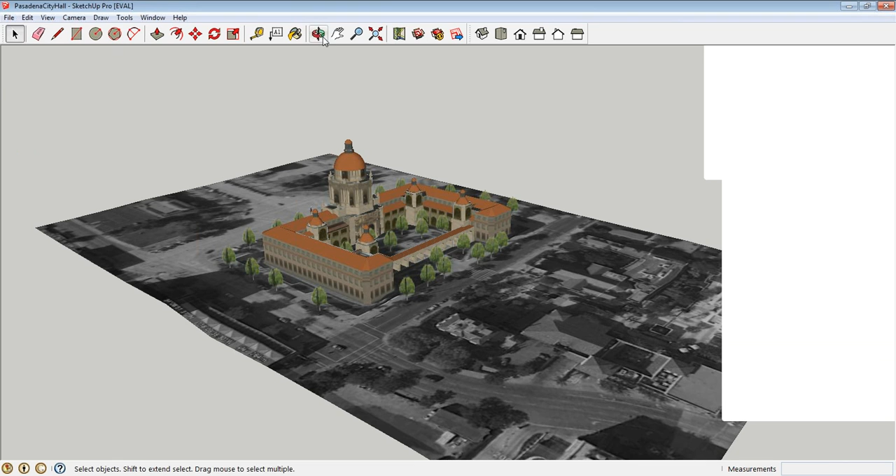Let's go ahead and take a look at Revu 12 in action. First, we'll go ahead and jump into SketchUp Pro so that we can demonstrate the new SketchUp Pro plugin.

Introduced in earlier versions of Revu CAD and eXtreme was the ability to create 3D PDFs from Revit, Navisworks, SolidWorks, or any IFC file. But now with Revu 12, you can go ahead and create 3D PDFs directly from SketchUp Pro by exporting a 3D model to Bluebeam.

We can go ahead and export this right to the desktop. And this really allows for a new means of communicating design ideas or articulating complex 3D information in the universal 3D PDF format.

So now that this 3D PDF is created, you can now easily navigate around your design model and even use section boxes to isolate portions of the model. Come on, dig right in here. Maybe chop that right in half.

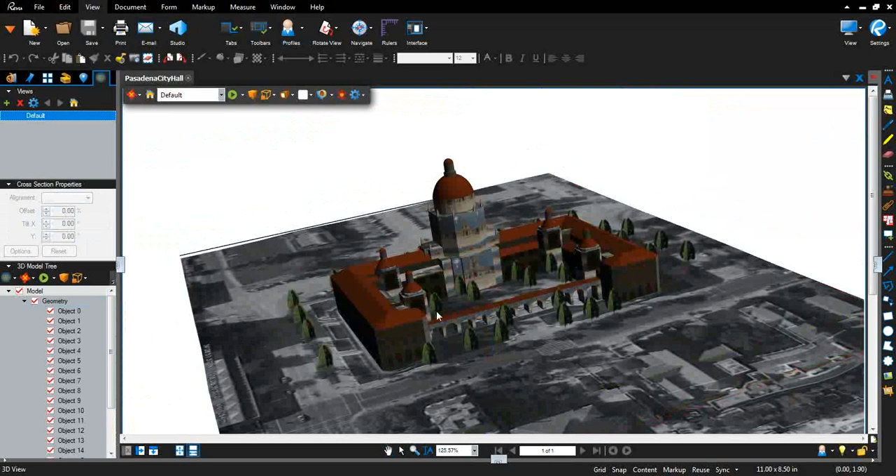Now you can also transform or move individual model components or even a full group of components over here. So we can select all these trees. And if you think about it, this would be a great way to, for example, explode your model diagrams, showing how different components assemble.

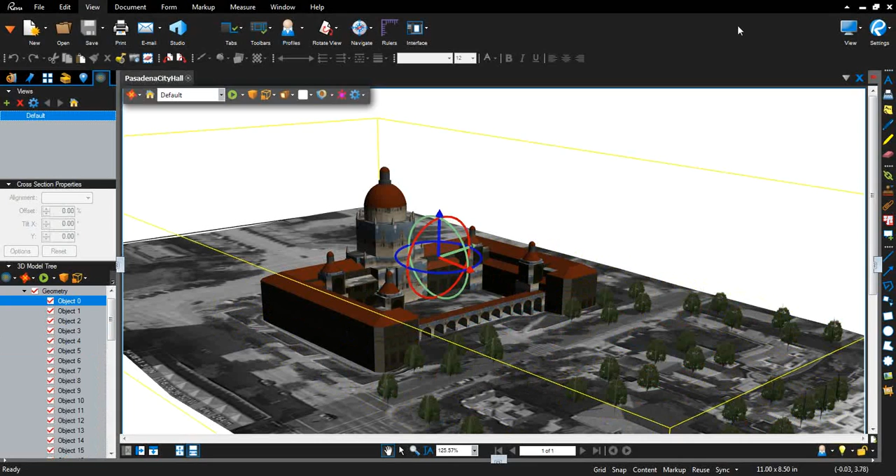And of course, using Revu, you can always add markups to your 3D PDFs, allowing you to more easily communicate project information with everybody, not just people who have expensive design programs.

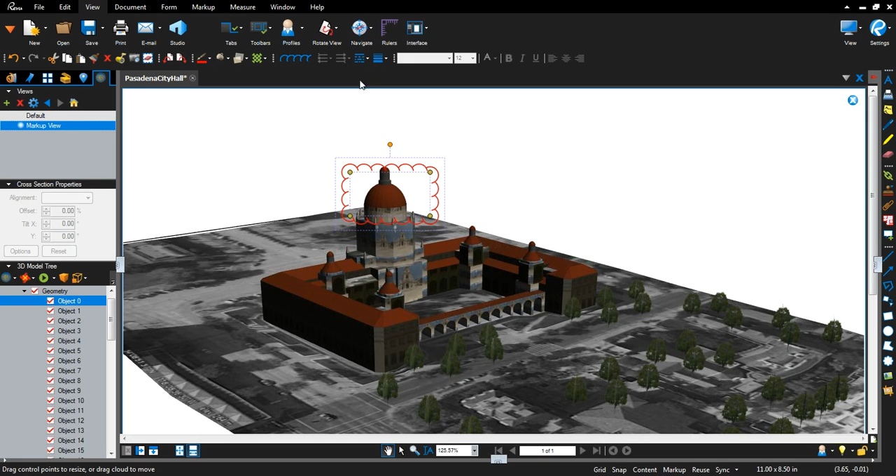So with Revu 12, our robust 3D PDF options have expanded, but we've also added plenty of enhancements in the 2D world. So let's go ahead and take a look at those now.

So to go ahead and get started here on your project, one of the first things you're typically going to want to do is to create a smart document set that's easily navigable by users in the field.

So if we open the Thumbnails tab over here, one of the things that you'll notice is that these pages are all numbered pretty generically, 1, 2, 3, 4, etc. Instead of manually typing in the appropriate drawing number for each page label, we can simply go ahead and click Create Page Labels, and actually use a page region to get that drawing number.

Now with Revu 12, AutoMark just got smarter. Now we can go ahead and select multiple regions on the page, so we can even add this drawing title perhaps, and even add prefixes and suffixes, giving us complete control over the way that our bookmarks or page labels appear.

As you can see, Revu has gone ahead and created these page labels for the entire set in just a matter of seconds, right? All labeled up.

Now, even better, your text doesn't even have to be searchable to be selectable, or selectable to be used with AutoMark 2.0. It works with files that contain non-searchable text, such as scans, to get your PDFs in order, regardless of how they were made.

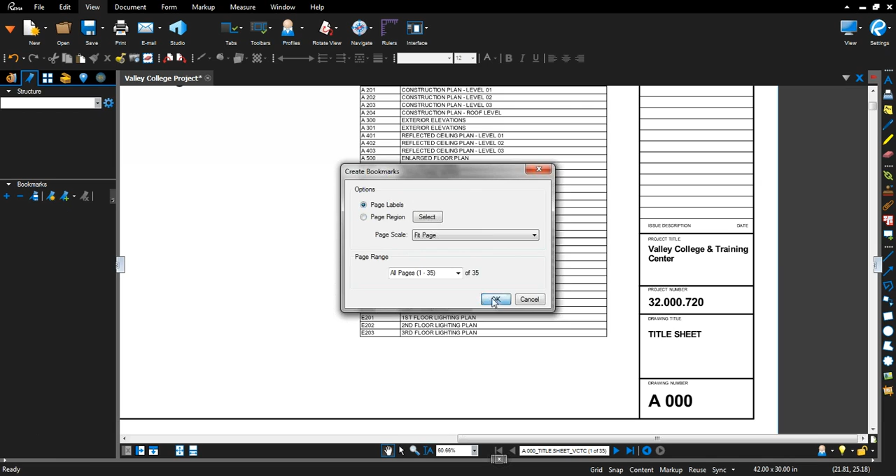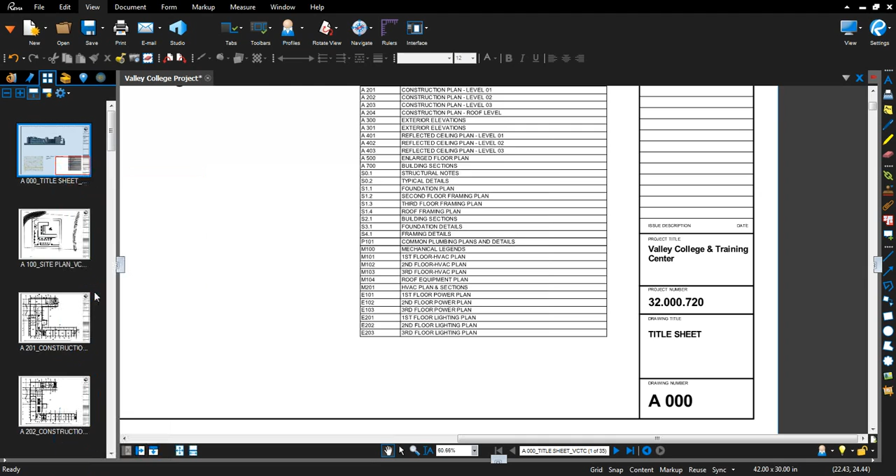Now, in the same way that we created our page labels, we can also just as easily create bookmarks for our document. And as a final step, we can easily extract each of these sheets as a separate PDF, so we can create a lean and light set of documents for quicker field access.

So we'll take all these pages and we'll extract them as separate files using those page labels to name them, and go ahead and update our hyperlinks with relative paths. There we go.

Select that folder, extract those sheets. Now what you'll see real quick right here is that we've got all of those sheets in this folder. Quick and easy.

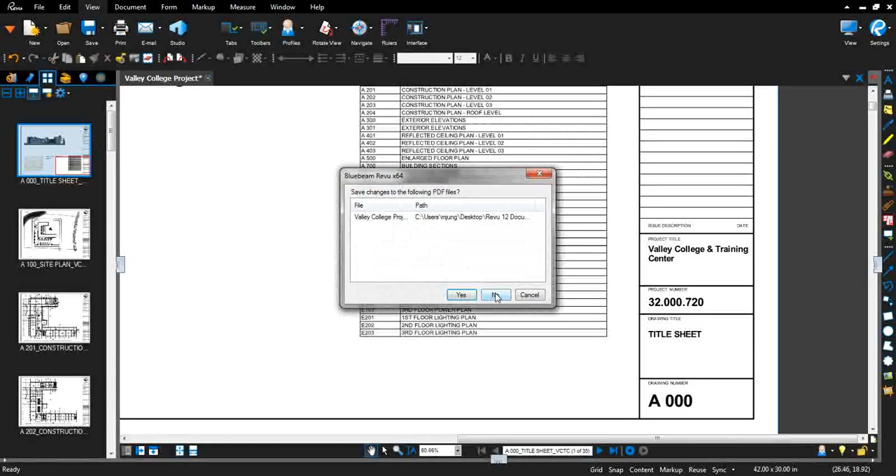Now, unfortunately, there is one drawback to working with sheets this way. That problem is that as we open each new file, they're going to open on a new tab. You lose that flexibility to work with those related files like you can in that combined set of documents.

Now in Revu 11, Sets was introduced to fix just this issue. So here within Sets, I'm going to go ahead and create a new set that will allow us to get the best of both worlds. We'll have the flexibility to keep our files light and lean and simultaneously be able to view and navigate them as if they're a single document.

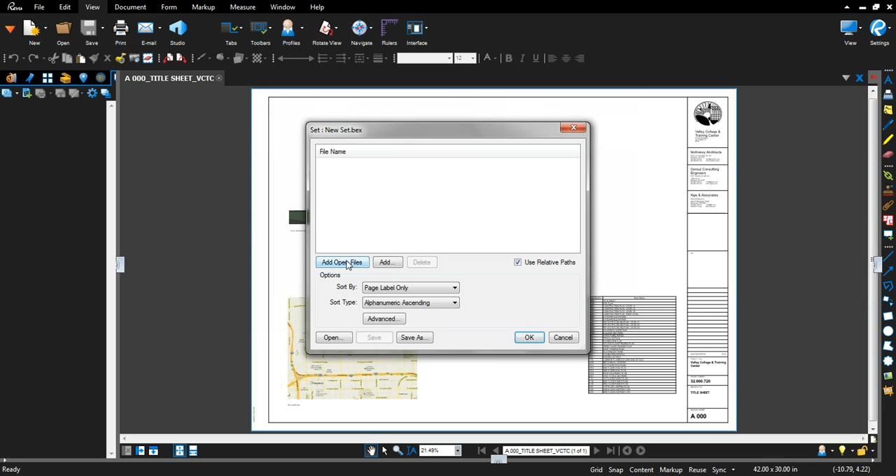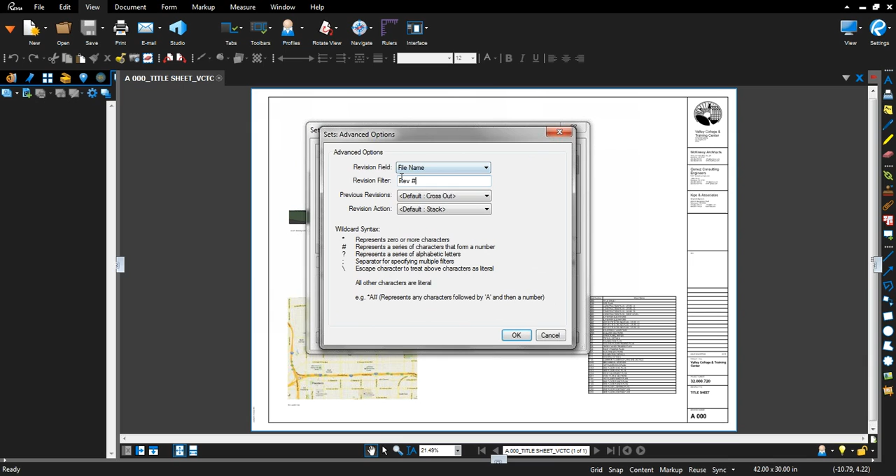So we'll add all of those files that we just exported here, open those up, and sort them by the file name and page label. Then using the advanced menu, we're going to establish a rule here that will allow us, based on that file name, to take any revisions and stack them and cross out any of the older numbers. Let me make sure I've got that revision typed properly here.

And then I'm going to go ahead and save this set right here and click OK. What you'll see now is that we have all of these sheets, and they open in a single tab, just as though they were a single document.

Now in Revu 12, Sets 2.0 introduces a few enhancements, including the ability to view these files as a list instead of thumbnails, keeping that easier to view. But also the ability to tab through, either using the up and down arrows on a keyboard or using the arrows down here to navigate through the document set.

Now, sets are also fully compatible with Studio Projects, making it even easier to share your set with the entire project team. For those of you who are not aware, Projects is a free feature in Revu that acts as a lightweight document management system, allowing you to store an unlimited number of files and file types.

Now all of your project partners will have access to the entire set and can open and check out individual files from within the set as needed, straight from Studio Project. And of course, these files can be synced down locally so that you can work offline while you're in the field.

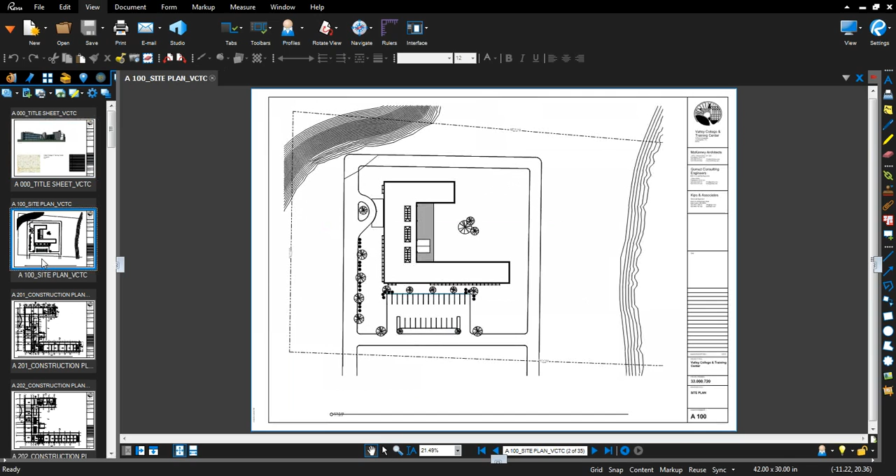So this is great. We've got our set going here, with our page labels. To get going with this project, we really want to create a navigable set of drawings, something that will allow both our office and field users alike to quickly click to a reference sheet, elevation, detail, RFI, or something else.

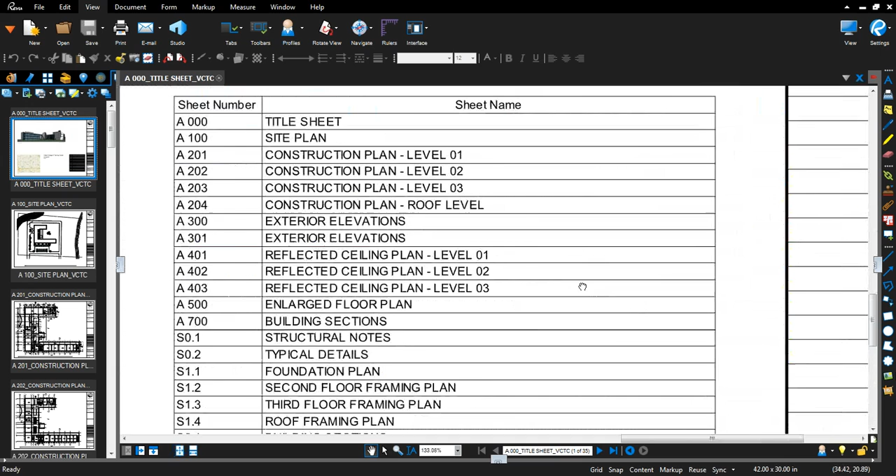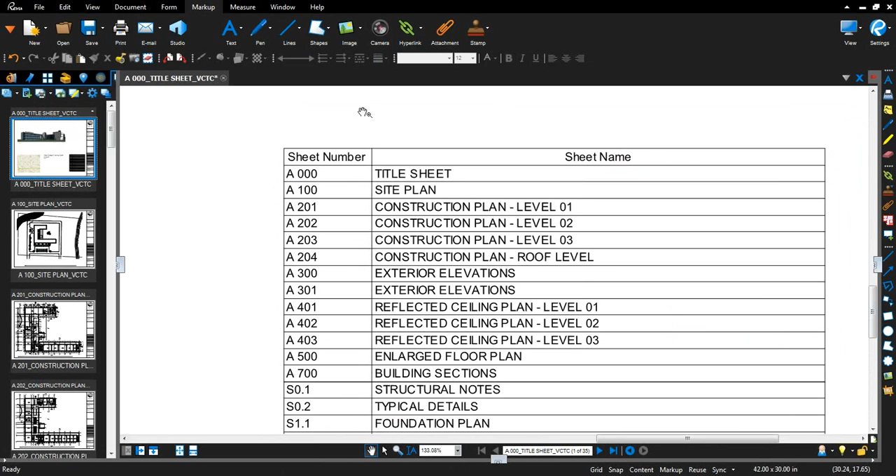So the current process for setting up these hyperlinks and making this navigable plan set is that we go over here to markup, click hyperlink, highlight that, select file A100 from our folder, click OK, and go through and do it again. As you can tell, this is a pretty time-intensive process, easily a couple days and or weeks, depending on the size of the project, for either an intern or a project engineer.

Now with Revu 12 Extreme, we can automate this linking using the batch link process. We can search through our files, a folder, a series of folders, entire directories, or even go through this current set. And Revu will analyze all of the documents and automatically create hyperlinks to the corresponding destinations.

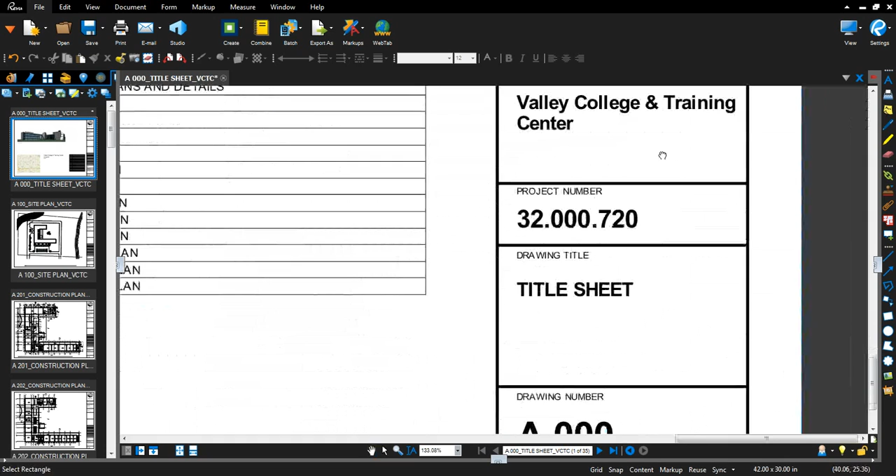So if we do this using the set, we're going to create the hyperlinked index sheet and link all of the elevation details in this set as well. We'll start by searching by sheet number, using that page region just like we did for AutoMark. Come on down here, take that drawing number, and we'll click OK. We can add more, but we'll go simple for this one.

Now, when we click Generate, what you're going to see is that a variety of sheets have now been linked to those page numbers, drawing numbers here.

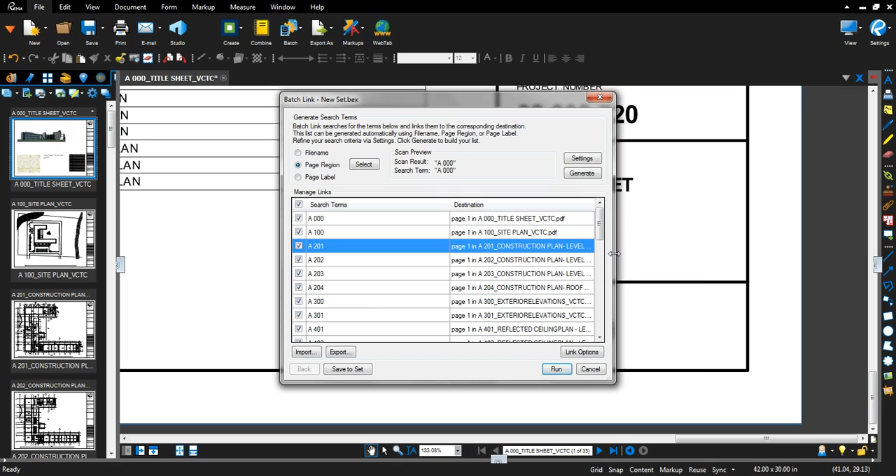And we can use the link manager to update this list as needed and save this configuration for future use. So if we did need to choose a revision instead, we could update that file name, or we can go ahead and save this to the set so that we can run this again in the future.

Now, one of the things to note under the link options is that we have the ability to highlight these links, making them easy to see on the page.

I'm going to go ahead and pick a nice shade of blue for that. Again, save this to the set so we've got all of those settings saved for if we have to generate new ones in the future.

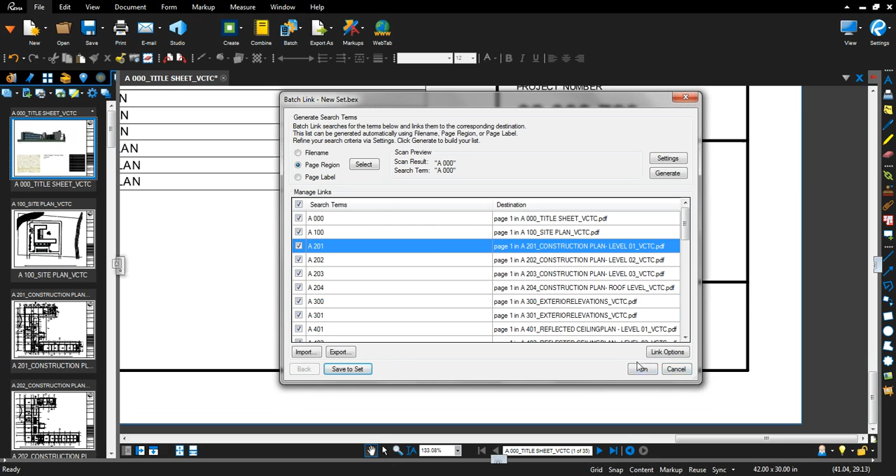And then as soon as I select Run, you'll see that all of these drawing sheets and details are being automatically linked together based on my search parameters. So just a couple seconds compared to a couple days or weeks, and we've got 132 links automatically created for us.

Now, as revisions are being submitted through here, actually, let's step back a second and let me show you how those links actually work. So here's that first link, A201. Here's an elevation detail, A300. And what you'll see is that there's another detail here for A700. And we can click right through all of those as we navigate through the document.

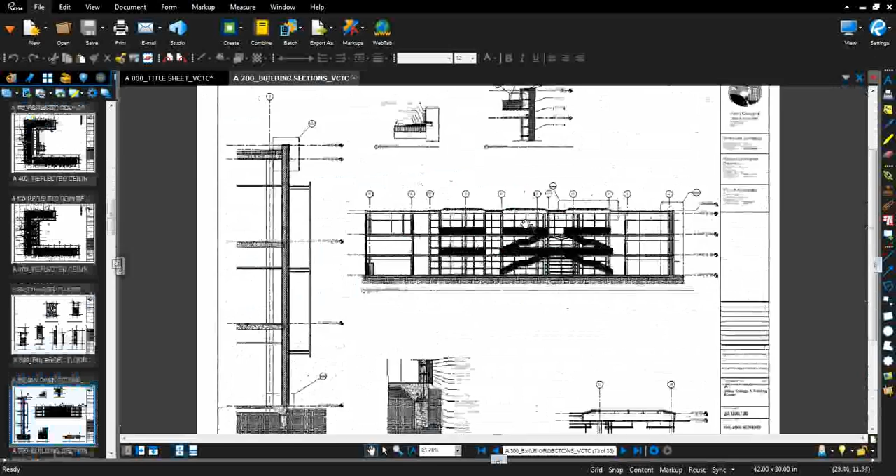Now, of course, with any project, there's always going to be revisions. And as they are submitted throughout this project, we can choose Add Files to update those files and add them to our set. So here's the revisions that have been issued since we created our set. We're going to click Open. And one of the things you'll notice right away is that Revu's gone ahead and stacked them here in the older revision and our original document here, which has those hyperlinks already created.

Now, the nice thing about sets in Revu 12 is that when it comes to this index sheet, it's automatically been updated within the set to jump to the correct revision. But we need to recreate all of those other hyperlinks on the page. And as I mentioned earlier, we can save those search terms so that when these new revisions come in, we could upload all the revised sheets at one time and reuse those batch link settings to add hyperlinks to them.

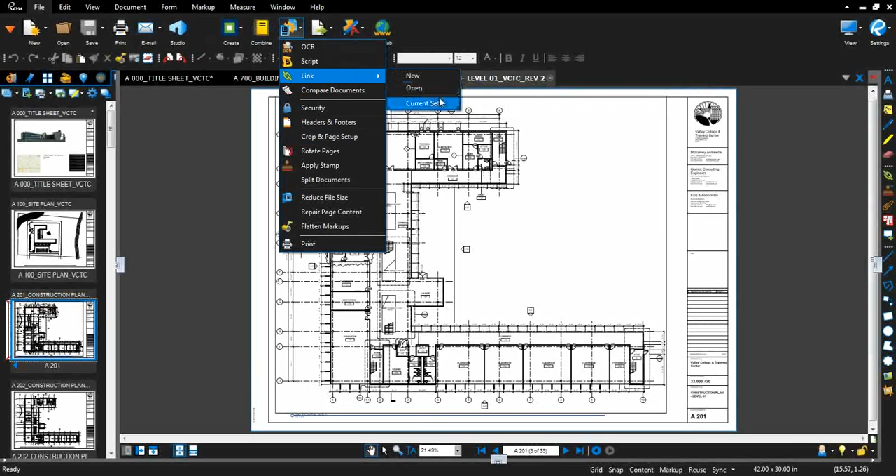So let's go ahead and run batch just one more time. So we'll batch link the current set. We're going to go ahead and select that page region again so that we can get that drawing number. Okay, and just regenerate all of these search terms.

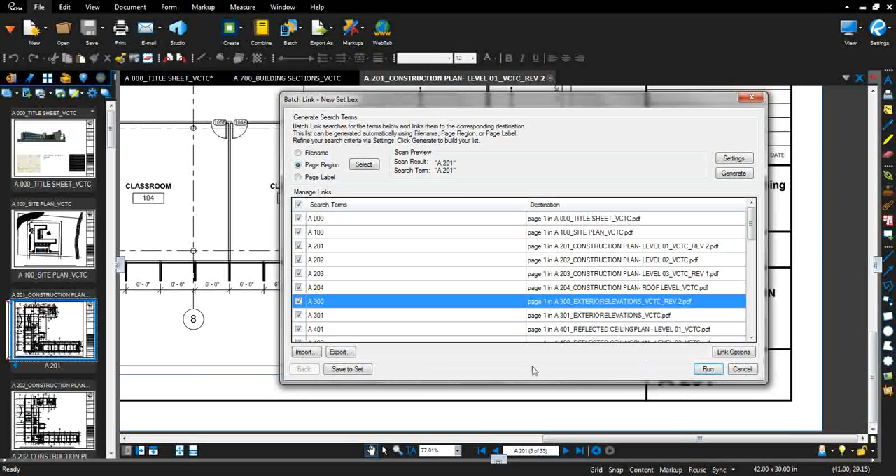And what you'll notice is that Revu's now come through and picked those revisions for our new search terms. We'll go ahead and save this to the set again and run it. And it's going to go ahead and recreate all of those hyperlinks.

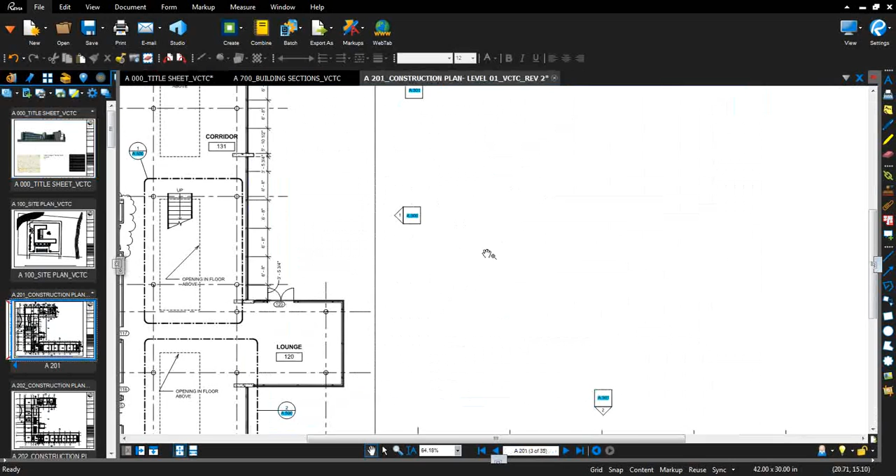Now notice that all of our hyperlinks have now gone ahead and been updated for us. 170 deleted, 172 created. And when we click to A201, we've now got all of those details re-hyperlinked here. We can jump to A300, and we can jump to A700 again. And that's all updated to the various revisions that were issued. And of course, all of those revisions are stacked and crossed out, as I showed you earlier.

Just as a heads up, BatchLink also supports Studio Project, SharePoint, and ProjectWise. So you can easily and automatically link drawings from a number of different document management systems. They don't just have to be on a local drive.

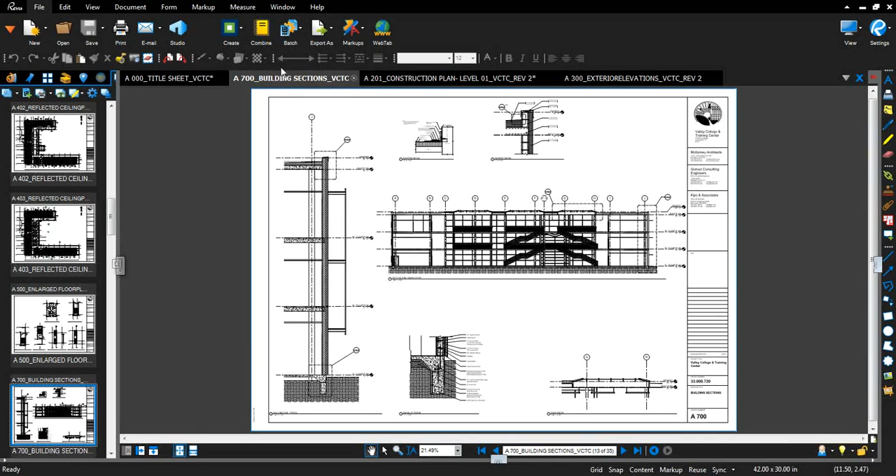Now, whether you're in the office or in the field, you're now ready to start your work, right? We've got all of these links set up and everything. So let's go ahead and take these plans that are organized, linked, and navigable and field ready, and let's go ahead and start some work.

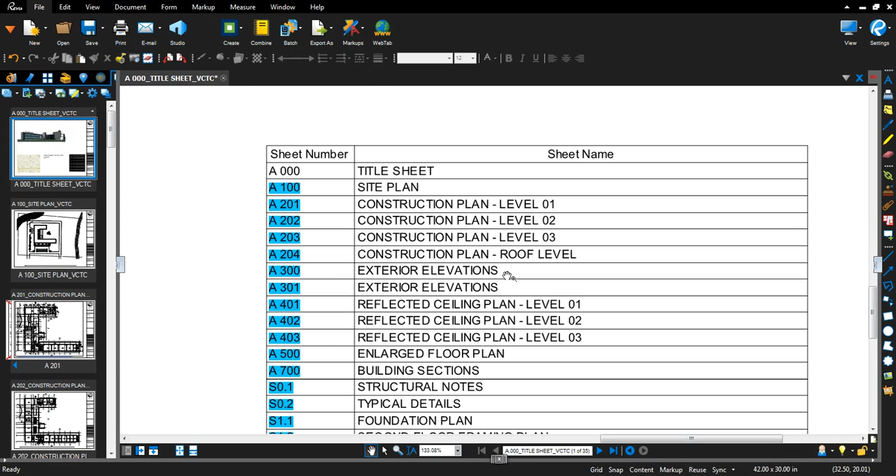For this example, I'm going to say that I'm a contractor here, and I'm going to actually be needing to do a flooring and drywall takeoff. So the first thing I'm going to do after I get this document open, is I'm going to go ahead and switch profiles into my takeoff profile. And as you'll notice, the interface has changed completely. We've now got a variety of new tools showing, and we've got the markups list open at the bottom here.

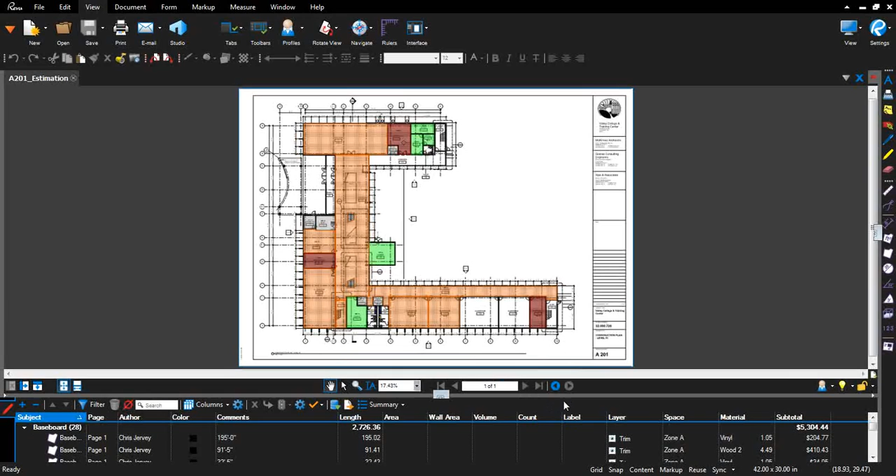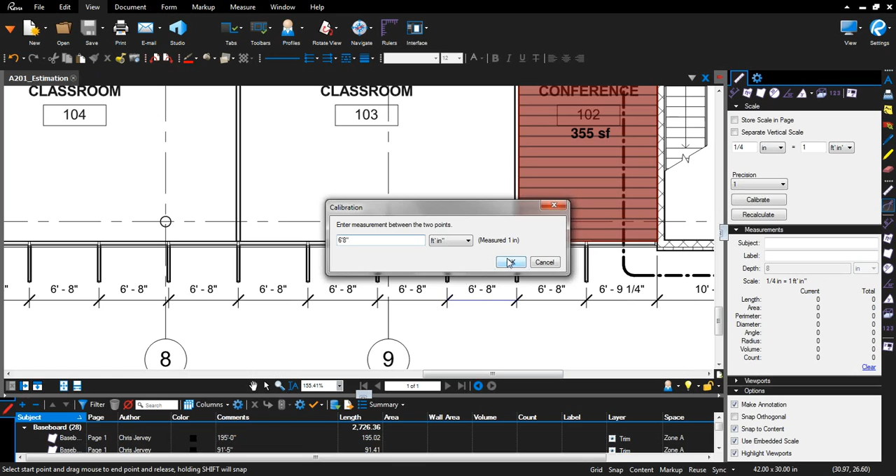Now, as a best practice for accurate measurements, we do want to start by going ahead and calibrating this document. So we'll go ahead and calibrate here. This is 6 feet 8 inches. Go ahead and click OK there. And now just to make sure we've got that right, let's take a reference measurement here. And that is 10 feet 5 inches. So we're ready to go now.

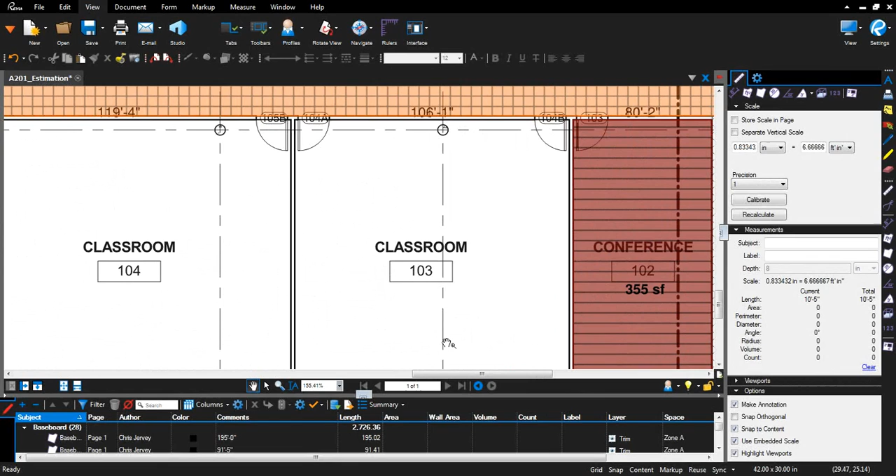So in this example, I'm going to go and look for the floor area of room 103. But at the same time, I want to get the wall area for my drywall takeoff. With Revu 12, now when I take this measurement of classroom 103 here for square footage, right? I've got that 708 square feet.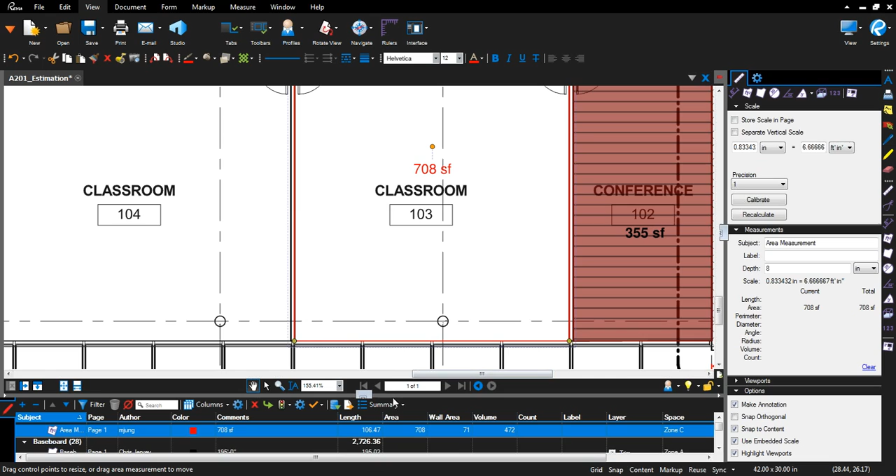Revu's also going through and automatically taking all the rest of the measurements here. So you'll see we've got that area measurement, but we've also got wall area, volume, and length. Now if we go ahead and change the height here for this wall to 10 feet, change that depth, that should be 10 feet. There we go, type 10 there. So let's say we change that depth to 10 feet. You'll notice that that wall area automatically updated to 1,065 feet, which looks a lot more realistic for a room of this size.

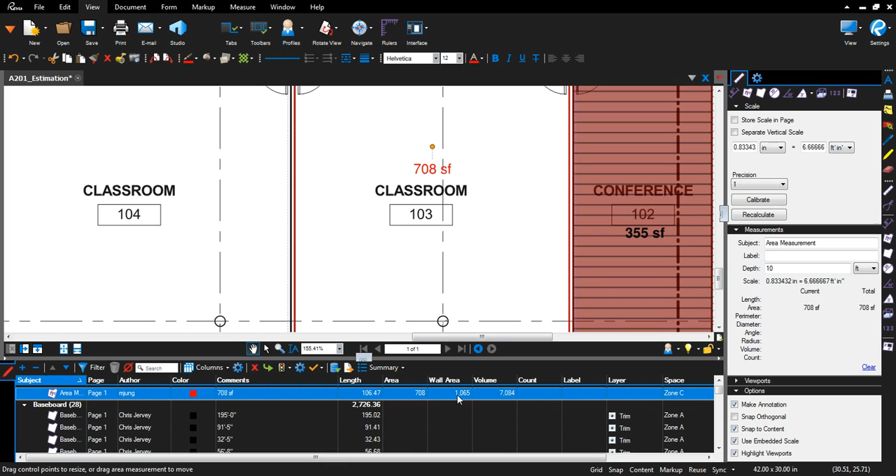Now another new feature in Revu 12 is Smart Group, which lets you take related measurements on the page and group them together. One of the things you'll notice here is that I've got some hardwood flooring measurements, and I can break those out here. I've also got some resilient flooring measurements, all of which are working together. We can go ahead and actually group those together so that we have a single group for all of our flooring measurements. So give that a double click, rename that flooring.

And under that flooring, we've got resilient flooring, and we've got our hardwood flooring. And we can actually go ahead with Smart Group and make changes to individual annotations within the group. We don't just have to make the changes to the entire group. So we can have one flooring be walnut, one cherry, and one oak, and that all updates automatically.

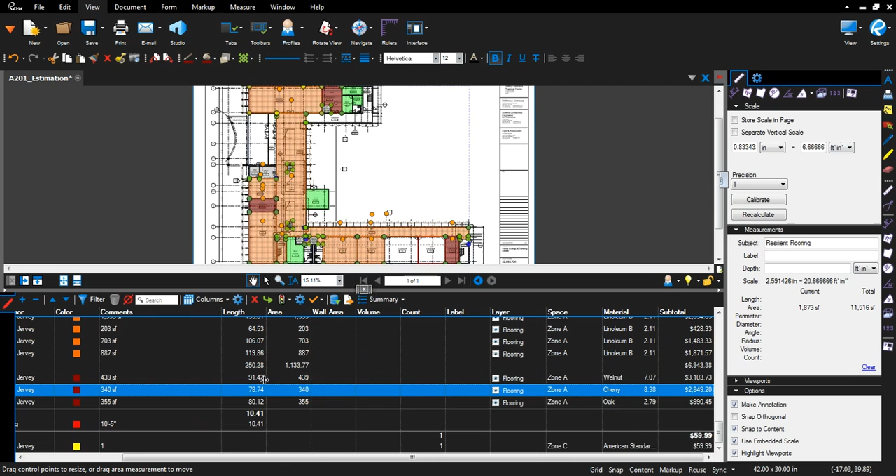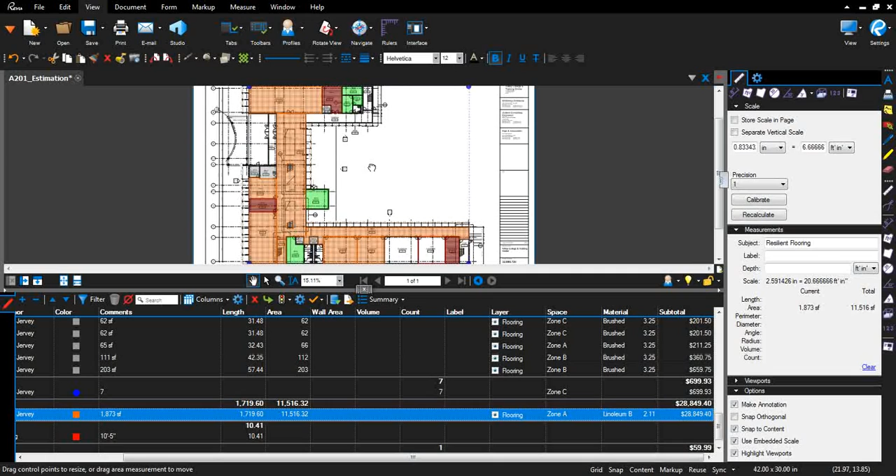Now as well, these group measurements now automatically calculate a subtotal in the markups list. So as we close this up, one of the things you'll notice real quick is that we've got a subtotal for length and area here, as well as a subtotal over on the side for the pricing. Same with our entire flooring up there. So we can actually close up flooring all together and just get a subtotal for what our cost will be for flooring. And there's a couple other cool new tools when it does come to measurements in Revu 12.

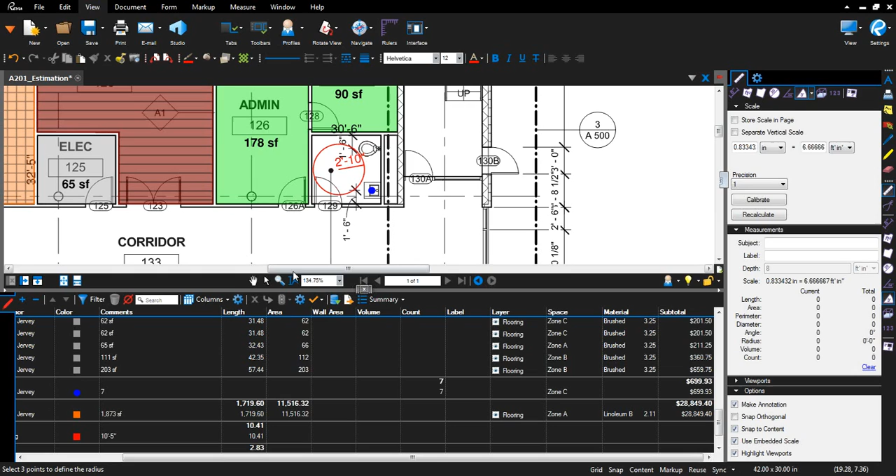One of them is the ability to take a center out radius. In Revu 11, you have the ability to do a 3-point radius, but with a center radius, now you can find out whether a room is ADA compliant by just pulling out and making sure you've got at least 2 feet 10 inches radius there. A nice turning circle for any wheelchairs.

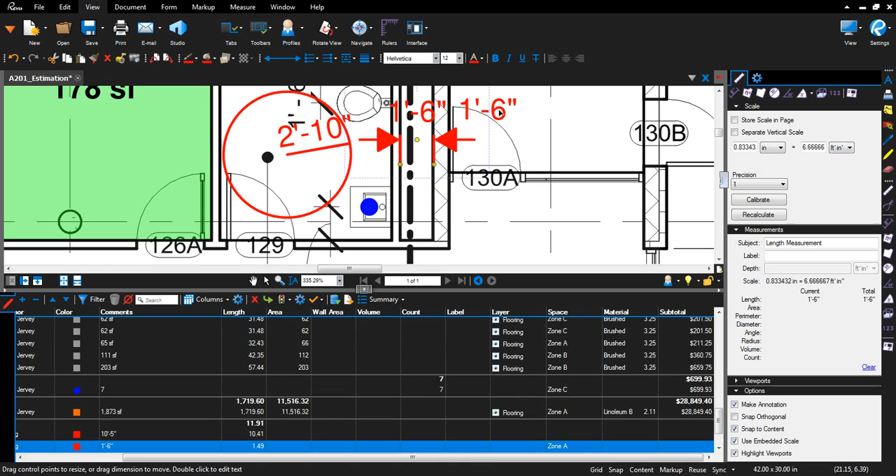Now another big change has been the way that we do length measurements for small lengths. So if we zoom in here, you'll see that this is a pretty small area. I'm going to hit the Shift key to make sure we get a straight line there, at 1 feet 6 inches. And what you're going to notice is that those arrows have gone on the outside instead of getting scrunched in the middle. And this measurement here can now be moved and even rotated. There we go. There's my rotation button. We can rotate that and now create really professional and clean takeoffs on the page.

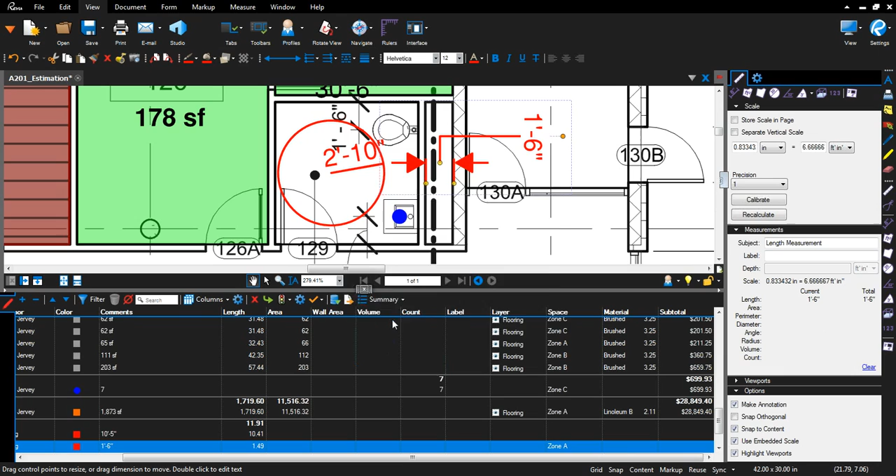Now, when my takeoffs are complete, I can go ahead and just export a summary to CSV. And now with Revu 12, instead of just including those markups, we can include the totals with them or just take the totals, which gives us the ability now to go ahead and just see all of our totals for this project. So really powerful tools that we've got going on here.

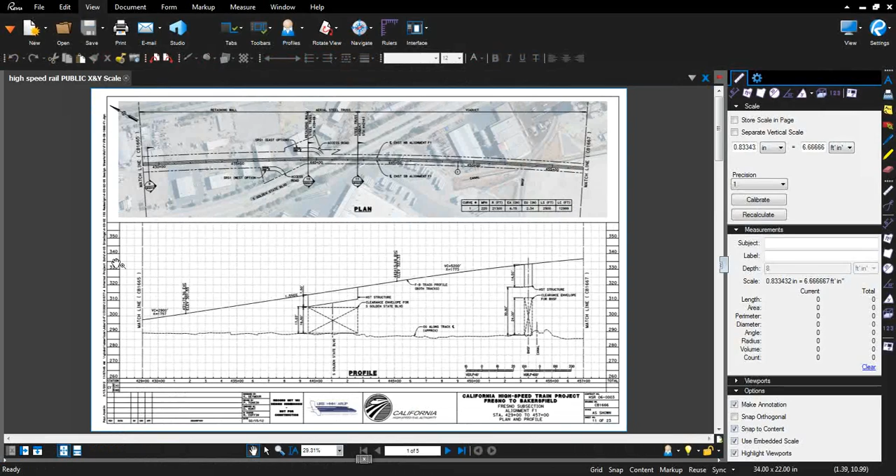Now we do have one other big change when it comes to doing estimation in Revu, and that's the ability to calibrate to both an X and a Y scale. For those of you who are doing civil engineering, this is going to be a big thing, I think, for you guys. So what this allows us to do is that we can take measurements on PDFs that have different X and Y scales by calibrating those scales separately.

So in the Measurements tab, you'll want to denote that there's a separate Y scale by separate vertical scale there. And then we'll want to go ahead and start calibrating. So first things first, we're going to go ahead and calibrate our horizontal scale here. There's 100 feet. And then we'll calibrate the Y scale, which is only 10 feet.

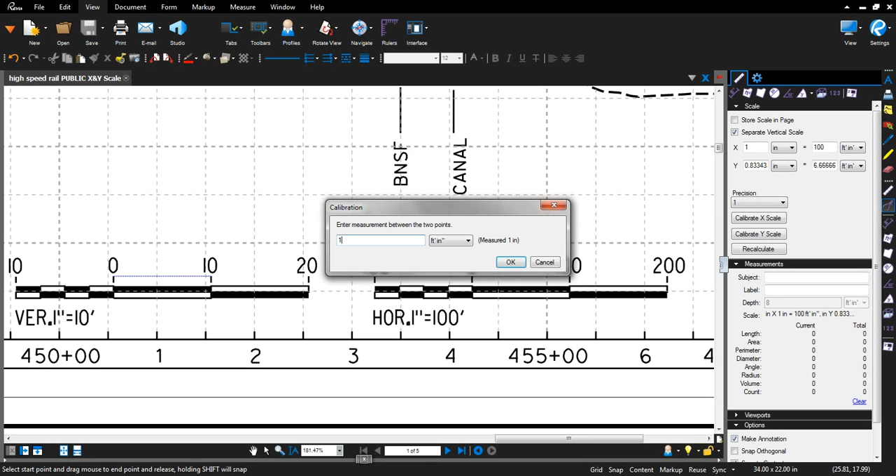Okay. And just to make sure that we are good on that Y calibration, we're going to go ahead and just measure straight on up here. And that's 24 feet 0 inches. So we got a perfect match there. Now, we can do that vertical measurement, right, and get that right measurement.

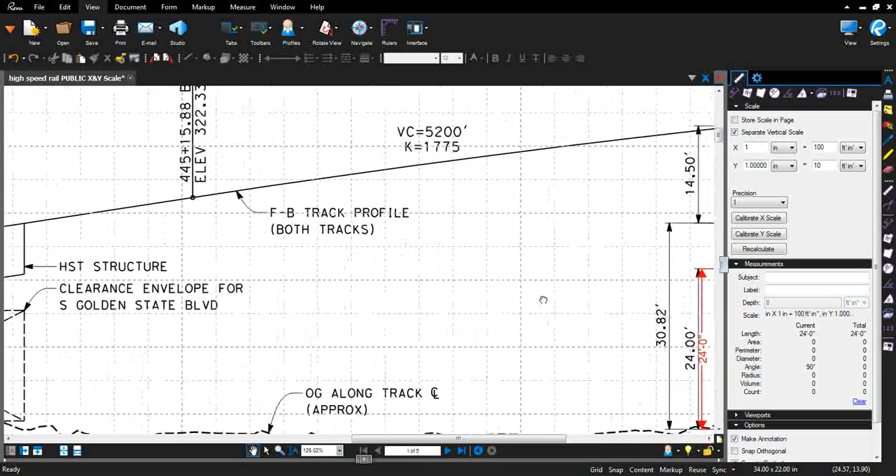But even more important is the ability to come through and actually measure these lines that are not on the X or Y scale. They're really a diagonal line. So we can now start measuring railways, bridges, roadways, or pipelines. And it's never been easier or more precise than it is using Revu 12 with split vertical scales.

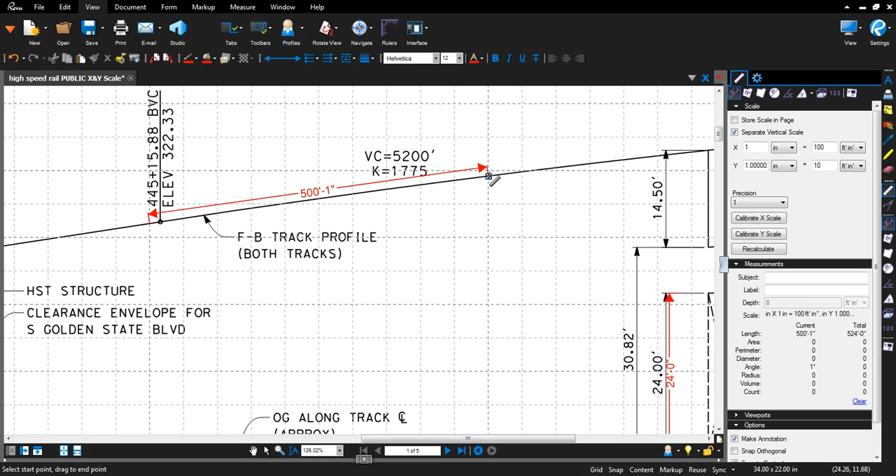Now finally, we do have one more enhancement, and that's Capture. As the project moves closer to completion and the often painful process of punch and back check begins, Revu's new Capture tool makes it even easier to track and reference site conditions and issues that need to be addressed. So let's go ahead and complete our punch walk here in real time by logging into the Studio Session and switching over to our punch profile.

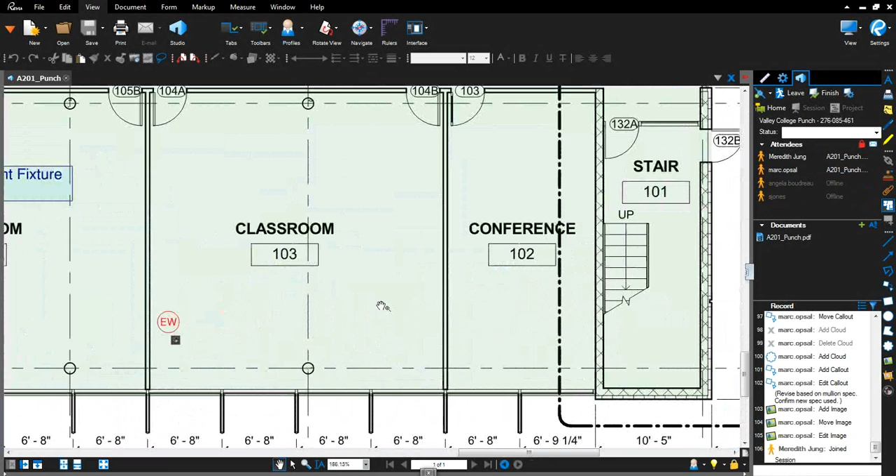Now one of the things that you're going to notice in our punch profile, we'll jump back into Studio on the side there, is that my colleague Marc is actually hanging out with us here, helping me to punch this building. And he's out on his iPad in the field. So if I were out in the field, let's say at one end of this building over here, I could go ahead and, using the tool chest over here in the punch profile, throw down some punch keys.

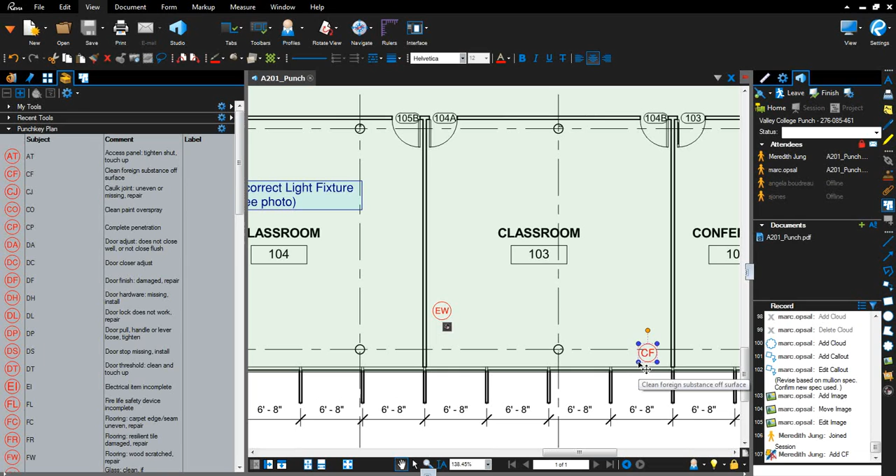So let's put this into detail mode so we know what we're punching. Let's say that there's a foreign substance on the surface of this wall here. We can go ahead and throw that punch key down. Now, if I saw that there was actually a problem that needed to be repaired, let's say we've got some problems with the drywall surface here, maybe a crack there.

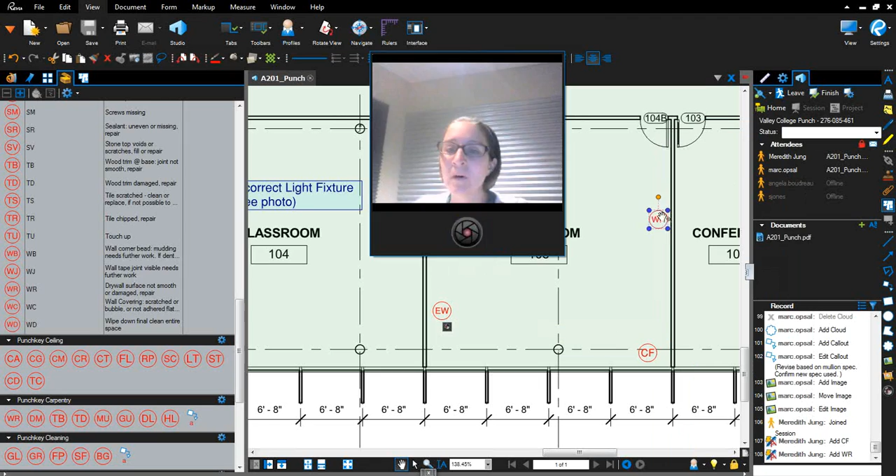With Capture, I can now associate pictures with that from my camera, or even go ahead and associate them from a file. So we can go ahead and capture, pick from a file right on the desktop here, take these images, and here's that wall issue right there. Open it up and drop it right on. Now when we click that image, what you'll see is that crack shows up on both of those wall images.

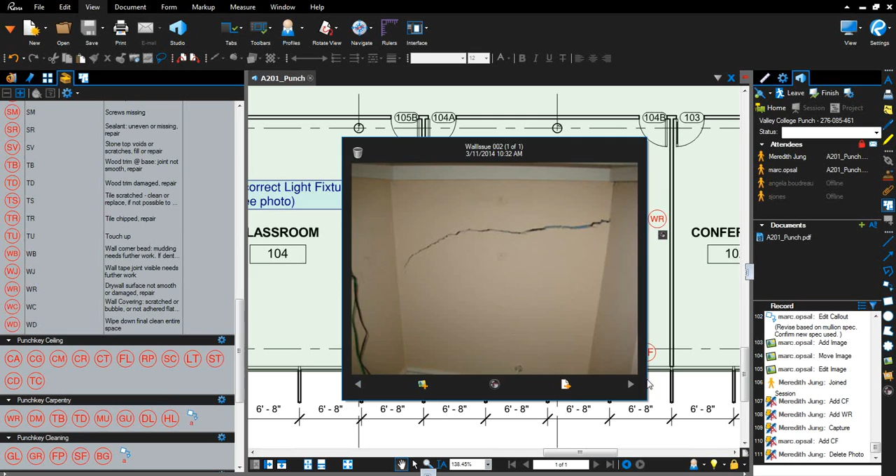Now, we could even add additional photos if we wanted to from this dialog here, or we can go ahead and delete some photos just using the trash can there. Now as well, if Marc is in the field and he's asked me to take a look at what he's doing, I can go ahead and follow him around. And it looks like there's some wiring issues over there. And he found some other ones in this room. Just going to take a look at that.

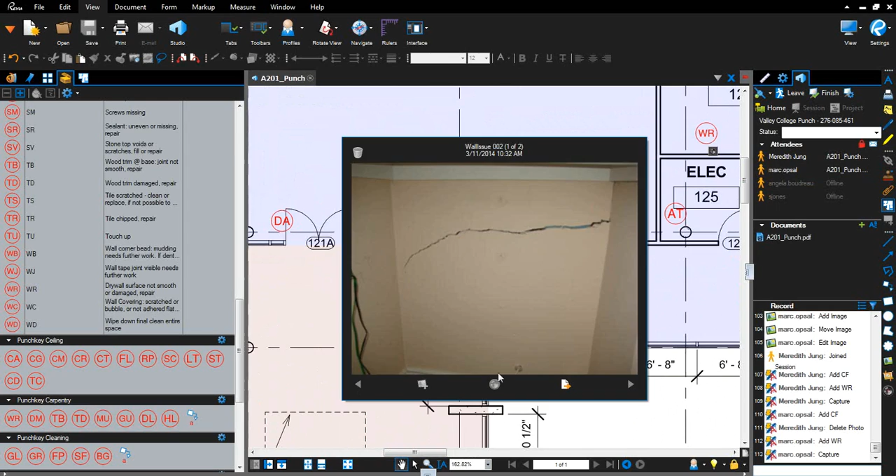Oh, that's actually a wall issue there, similar to the one we saw earlier. Looks like there's a lot of work that needs to be done here. Oh, but here's that issue again. And he's found some more in the building. So we can now all be looking at the same stuff and really documenting those photos from the site right here onto the PDF without having to go through and add them directly to the PDF with the image tool. They're now nicely hidden with that markup.

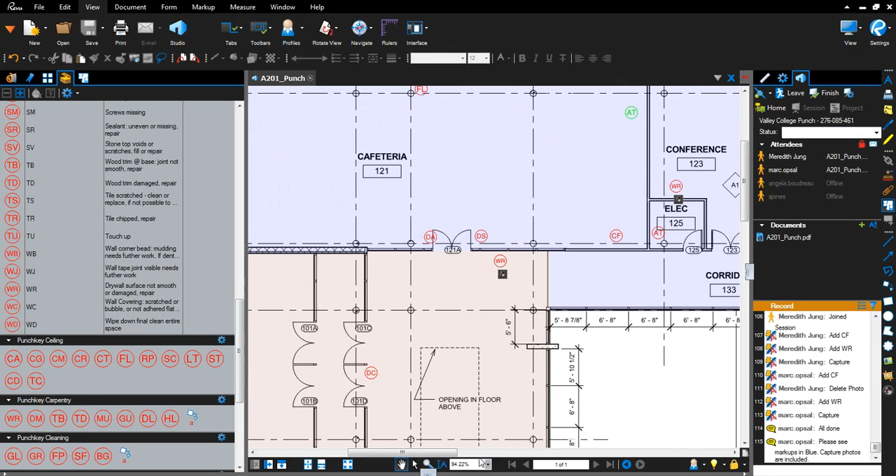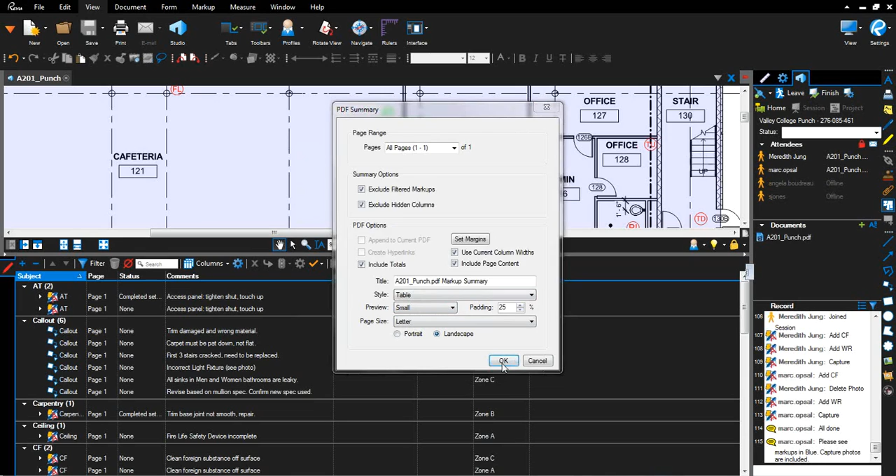Now, when we're done documenting our site walk, I can go ahead and sort and filter these all by subject. So come down here, go ahead, sort and filter by subject. And then we can actually go ahead and create a PDF summary. And I'm going to create a table summary so that we can see all of those images right on the summary. Revu's going through, and it's going to create just a single report with all of those images.

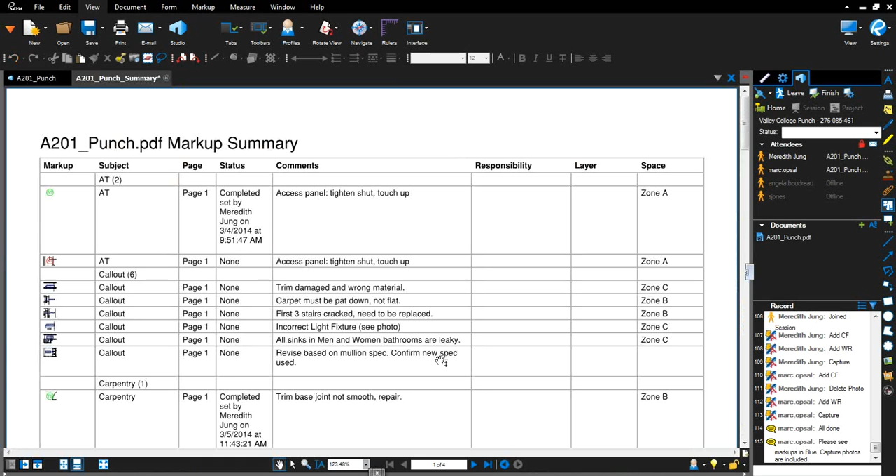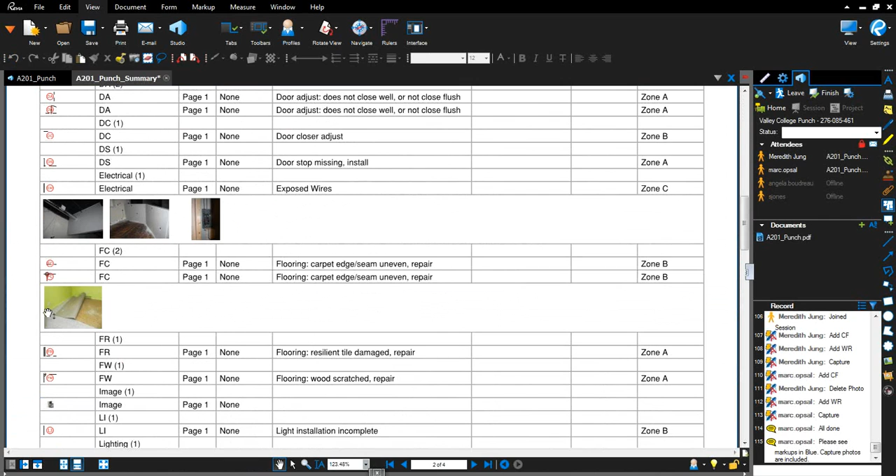And what you'll see is it's got everything we've done. It's got any notes based on it, and any images that are related have gone ahead and been added here. We've got exposed wiring, looks like the carpet's coming up. So there's a lot of problems we need to take care of here. But the good news is that as those various items do become addressed, I can now go through and use the statuses to determine that they're done.

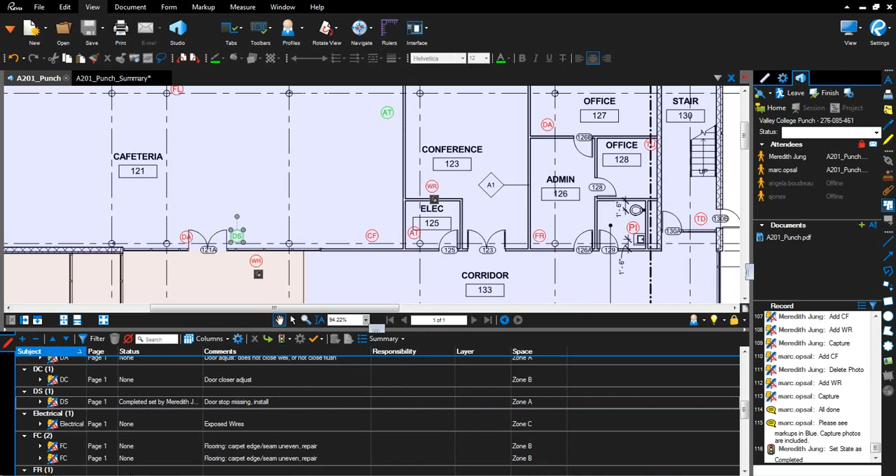So let's say we're down here, we've got a missing doorstop. That's actually been completed. So we can come down here, GC status, completed, all done. Exposed wiring, oh, we took care of that too. Again, GC status completed. And with that change, you can see that it's now green and easy to tell apart from all of those red markups there. So we can easily determine which items have been completed and which items are still outstanding.

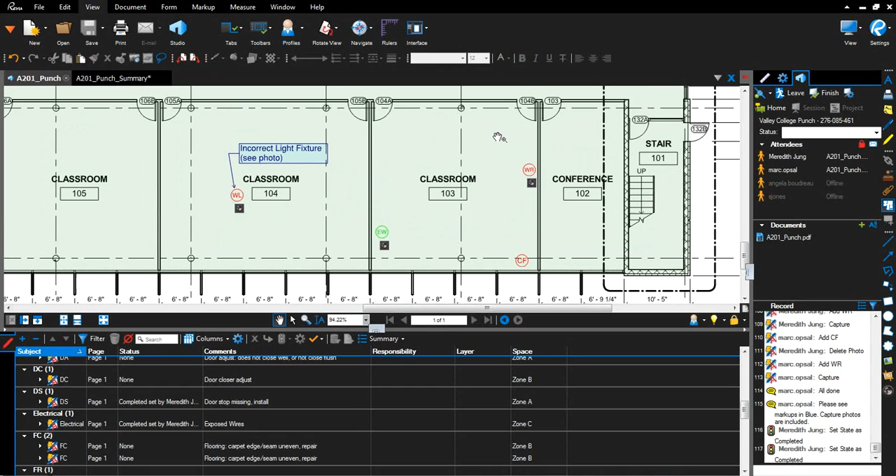That concludes this presentation of Revu 12. And let me go ahead and jump us into the slides again. And we'll go ahead and take your questions at this time. So please feel free to type them in, and we'll open this up for Q&A.

All right. So it looks like we have actually several questions for you. Awesome. All right.

So what toolbar are you using to do sectioning? Can you do the same with a Revit model PDF export? Yeah. So all of the 3D PDF capabilities that I showed you, and go ahead and escape out of this again, all of those 3D PDF features that I showed you using that SketchUp model are actually available on a Revit model. So I'm going to go ahead and just open one up for you and show you what's going on.

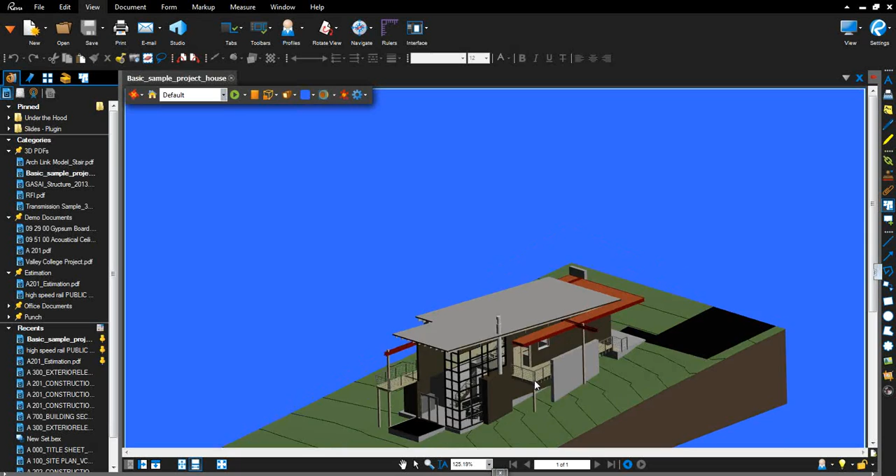So I've got your basic sample house. I'm sure those of you Revit users have probably seen this one a couple of times. And this toolbar that you see up top here actually defaults to turn on every time you open a 3D PDF. So now every time you open the 3D PDF, you have access to all of the tools, including the ability to move those model parts and to create those section boxes.

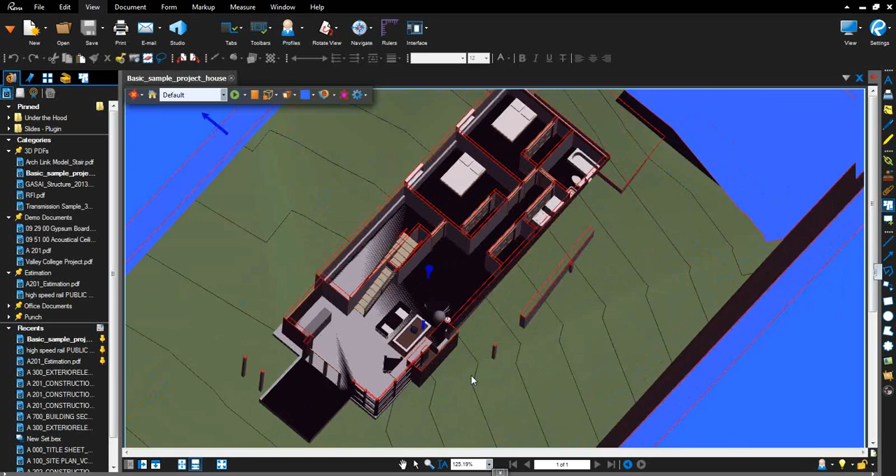So here on the drop-down, this is where we do cross-sections, but if you hit the little arrow beside it, you can now show a section box. And now we can cut right in and see right into the living room there. So pull in. And that's all done just directly from those 3D options that pop up every time that you open a 3D PDF in Revu. Great question.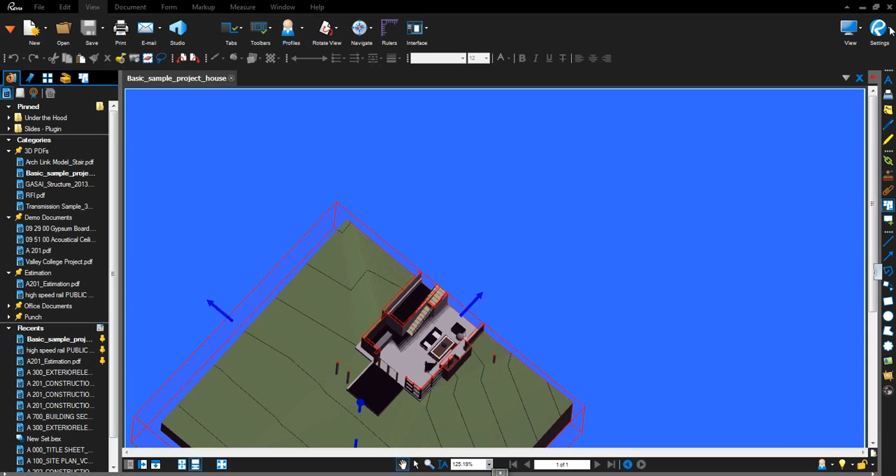All right. So then the drawings that are being seen in Revu 12, he wants to know, can he see them as a black background with the drawing as white, so white lines against the black background? If you export your PDF as a black background with white lines, that's the easiest way to do that. There is also the ability within Revu to go ahead and change the coloration, and I'm just going to have to remember where that feature is. But we do have a feature available. Let me go ahead and find it here for you.

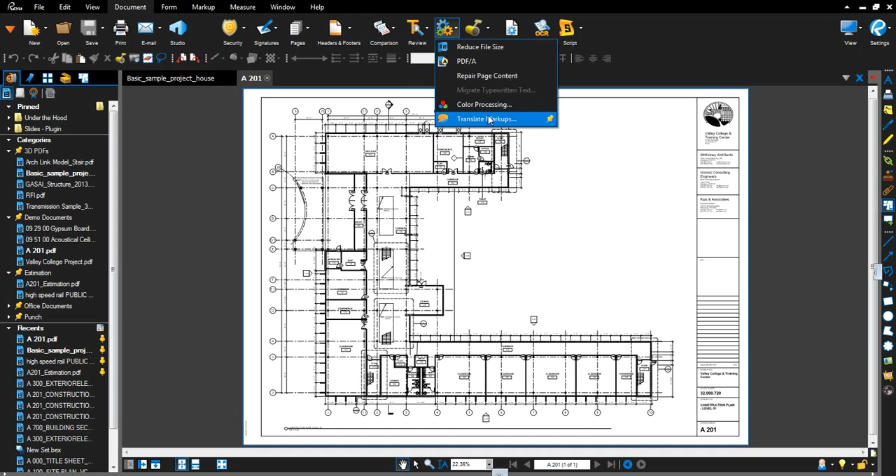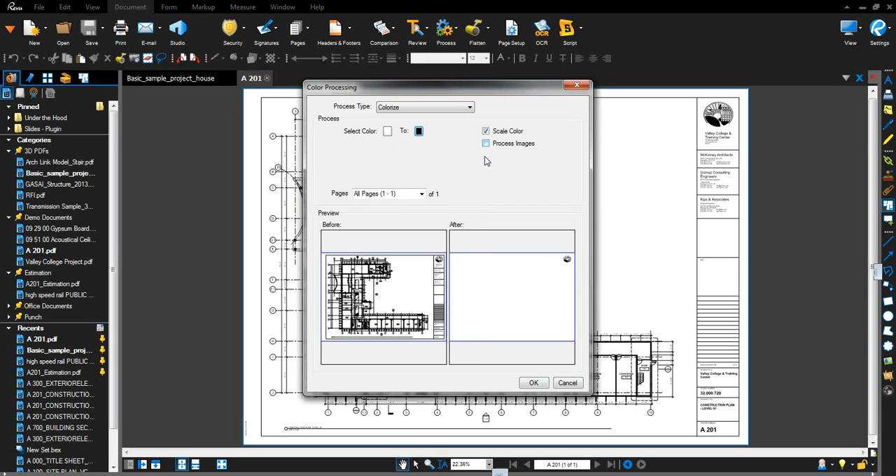Process, here we go, color processing. So your before and after, so you can take your source color of black and change that to another color. Or we can even colorize things that are black and white. So we can take anything that's black or anything that's white and change it to black and go ahead and process those images. So we do have those options, but the easiest way to do it is to export your model directly from Revit or AutoCAD or SketchUp or wherever you're exporting from with the black background and the white lines.

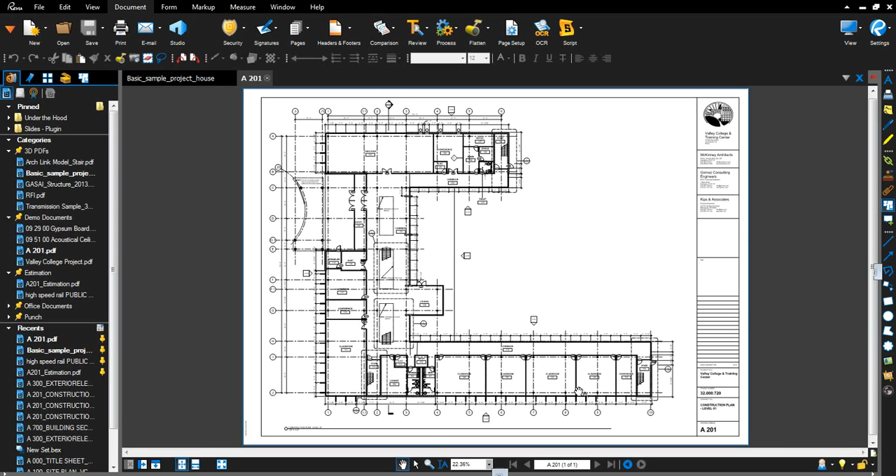Great. In the punch profile, a person who is in the field makes changes and saves them, can I see the same changes instantly while I'm at the office? Yes. So using Bluebeam Studio, which we were in over here, and which our punch document is uploaded to. Bluebeam Studio Sessions is real-time punch. It means everybody needs an internet connection, but it allows the people in the field and the people in the office to see the same thing at all times.

The punch profile just happens to be helpful because it has all of these punch symbols, but any studio session, regardless of what profile the person is in, does support the ability to see all of the changes that are happening in real time. So this is great for punch. It's also great for design review and plan review. So early into the project, as you're starting to determine, is this feasible? Do we need to make changes to the design? That can all be done as well in Bluebeam Studio Sessions in real time. Multiple people collaborating at the same time or at different times.

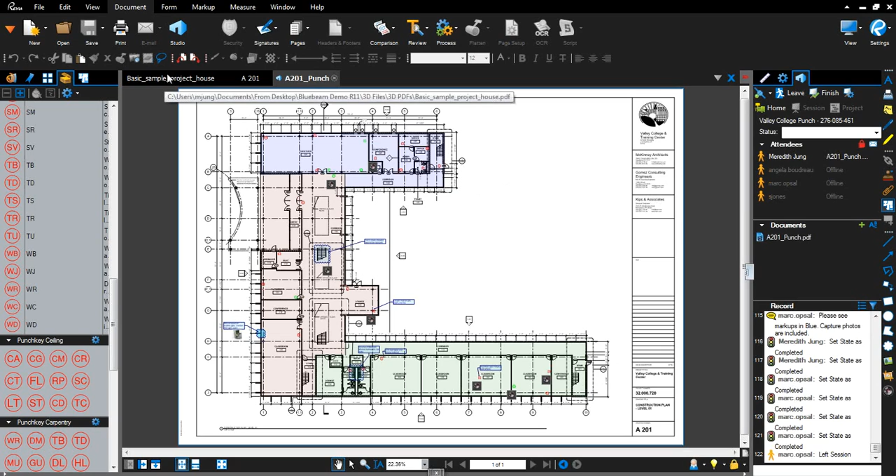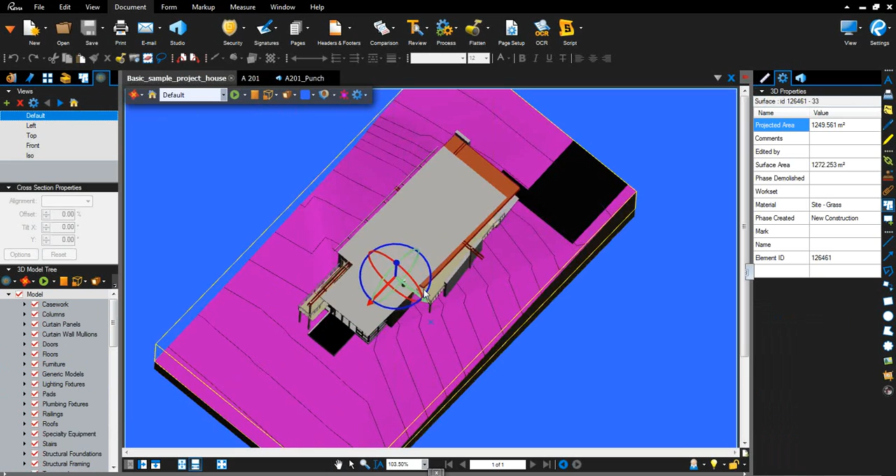Great. In 3D PDFs from Revit, the parameters or properties of the elements are also exported and embedded in the PDF? Yep. Was there more to the question? So when you export it from Revit, are the properties and parameters also exported and embedded into the PDF? Yes. So any of the properties that are associated with your Revit model or a Navisworks model will be exported with that part and will show up in the 3D properties.

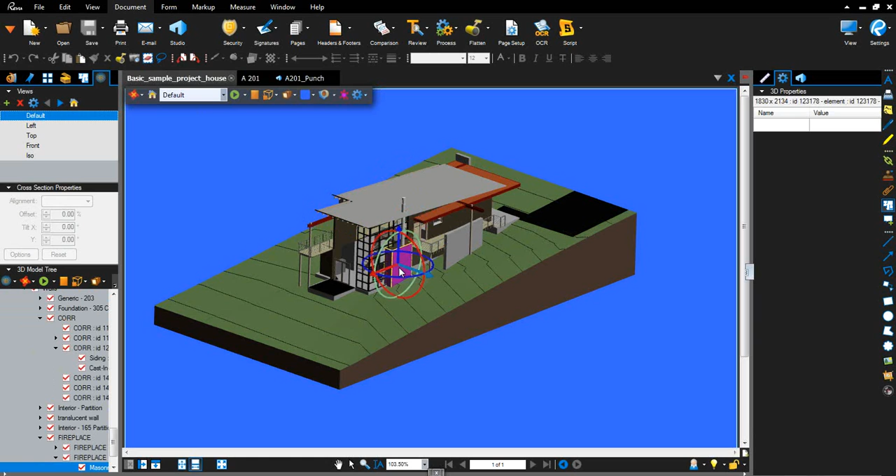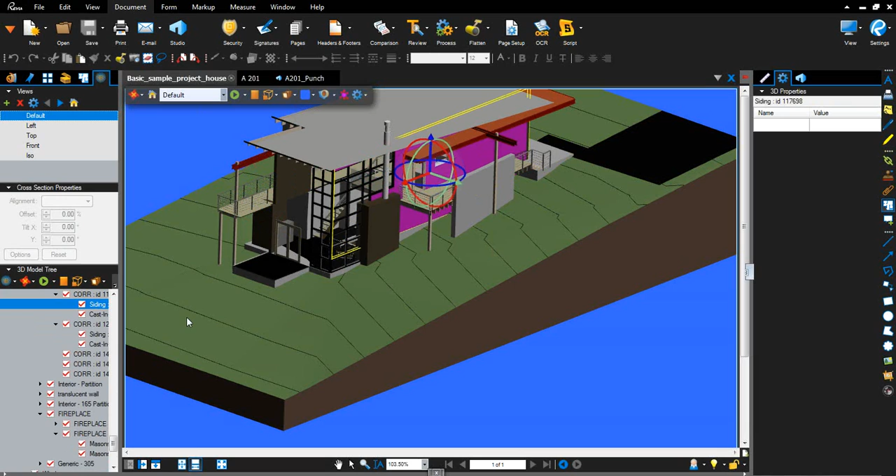So for example, this part has these properties. And as we click through, you'll see that different parts, some have properties associated with them and others do not. It just depends on the model parts that we used. Let me find you one. Here we go. So we've got a lot of properties for this foundation, not so many for some of the other parts. But as we click through, you can see the properties associated with any part if there are associated properties. So that does all get exported over, as does all of the naming conventions over here. So you can go through and see what types of windows and surfaces you've added.

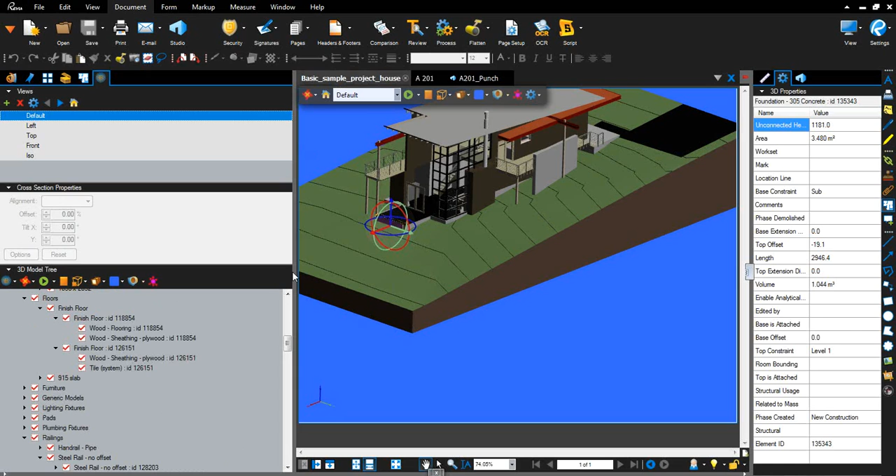All right, and we have another question about the coloring. Can we set the process of black to white background drawings as the default? So can you have a default sort of view setting? That's a good question. I don't actually know if there's a way to default that, but I can go ahead and look into that for you and get back to you with an answer for that.

Great. What if your device in the field does not have any data service?

Great question. So for people who want to take advantage of collaboration, but who have devices in the field that may not be connected to Wi-Fi, within Studio, we have an option called Studio Projects. So Studio Sessions is that real-time document-based collaboration, which is great for everyone to see the same thing at the same time. But if you want to be able to access those files in the field, say on an iPad or a tablet running the full version of Windows 8, Studio Projects is a great way to do that.

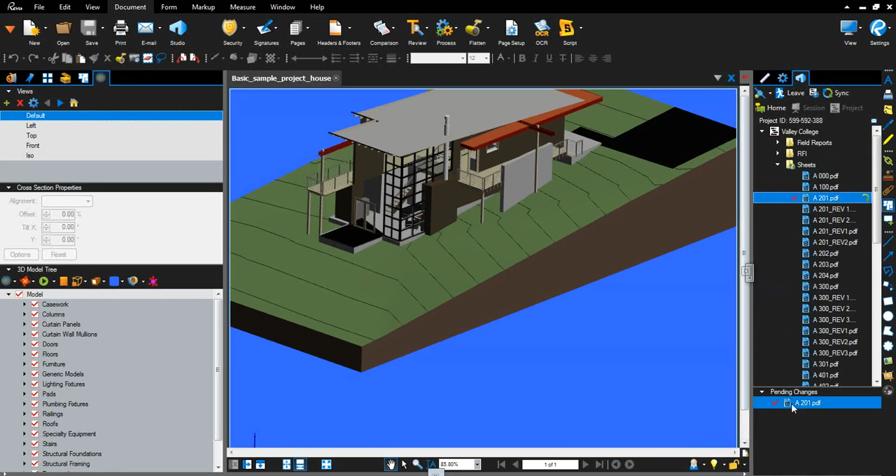While you're in the mobile trailer, you can go ahead and sync those files locally. So I've got the sync turned on here for A201. I'm going to go ahead and sync it to my computer, and I'm going to close this one. And then I'm going to go ahead and check it out now. So that's gone ahead. It's checked out pending changes. Now what I'm going to do is I'm going to take myself offline, open up that document, and add some markups while we're offline here.

So offline here, since we're in Punch, I'm just going to add a Punch symbol, that drywall surface. We can even add photos using capture while we're offline. I'm just going to go ahead and do that from the files on my computer, but that could be done with the camera. So all of this is taken care of. And now that we're done with this, we can go ahead and come back online once we're back in the trailer.

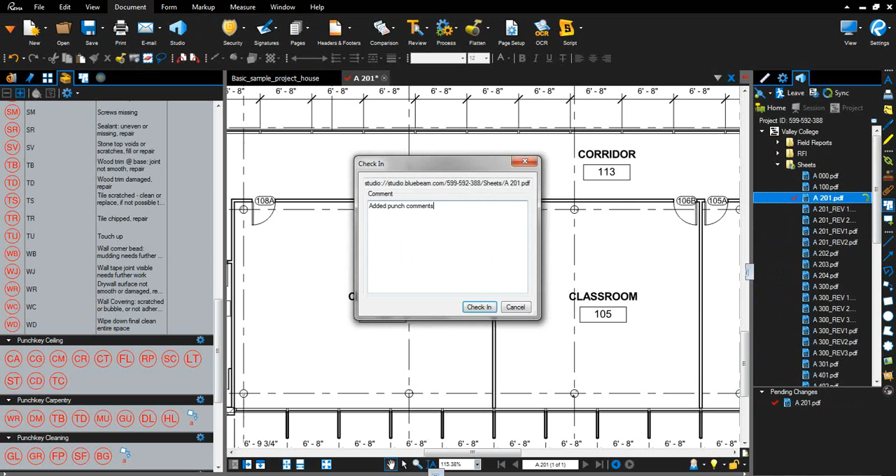Go ahead and check this in. Added Punch comments. Right. So now we've got that all checked back in and resynced so that we have the latest version of that file on our computer, or our tablet PC, in case we're headed back out into the field and need to access that file again. So it's not real time, but it does allow for multiple people to collaborate on a single document, with a check-in, check-out kind of procedure while they're in the field without internet.

For the icons on your desktop, can I see a thumbnail of my actual drawing as opposed to seeing the Bluebeam icon so that navigating through a list of my PDFs is easier? I'm also not sure about that one, but I can look into that one as well. I think it's just the Bluebeam icon, but I'll look into that. Great. Do we have anything else?

Does real-time let you do walkthroughs? There's no way to do a walkthrough in the way that Navisworks does a walkthrough. So even with a 3D PDF, while you can save views and allow people to see multiple views, there's no way to really automate a walkthrough in the same way that Navisworks does. So you will need that if you're looking specifically to do walkthroughs. But if you're just looking to share that model information, allow people to navigate through the model on their own, Bluebeam Revu will more than do that for them.